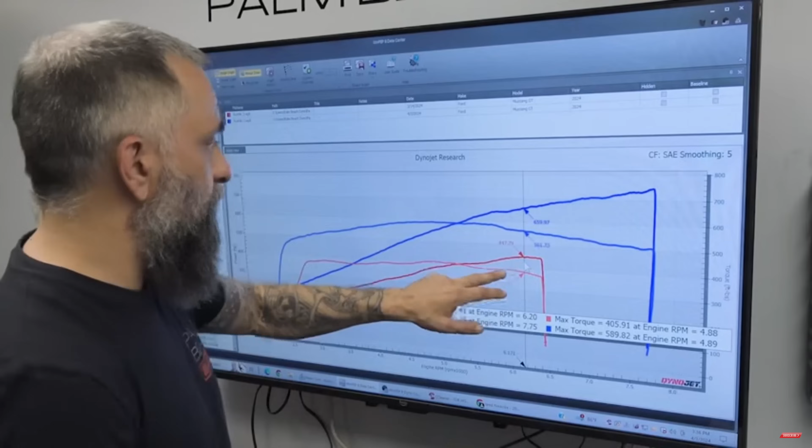So this is 4th gear versus 4th gear. Of course, we couldn't go all the way up in RPM before. That's why I showed you 3rd gear. But right here, well, we'll go to peak power. Peak power was 62 before, right there. So at the same exact spot, it's still up over 212 horsepower. And then, of course, with more RPM, peak to peak, we're up almost 300 horsepower. So all things considered, 746, 589, and this is on the 3.8 pulley.

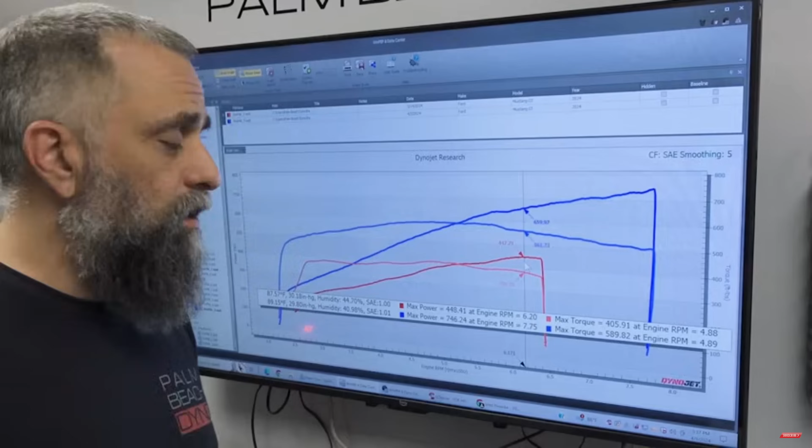On the lethal car, we had run the 3.7 and the 3.6 with the octane boost. So Kelly's starting off a little slower, but let's see if we can get anywhere near that 800 mark with the 3.8 pulley.

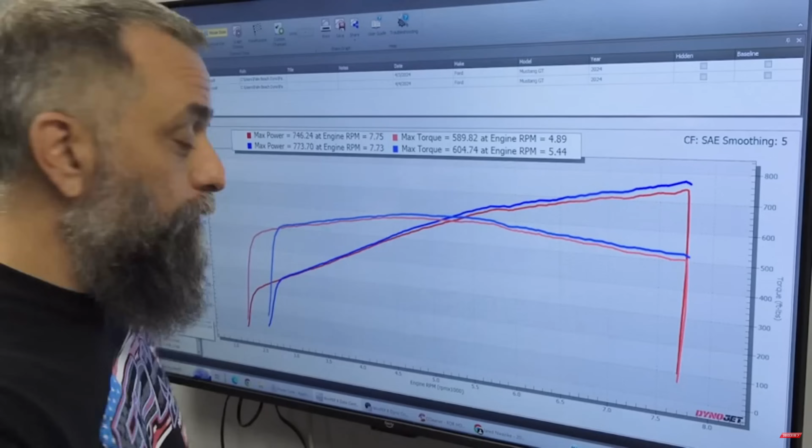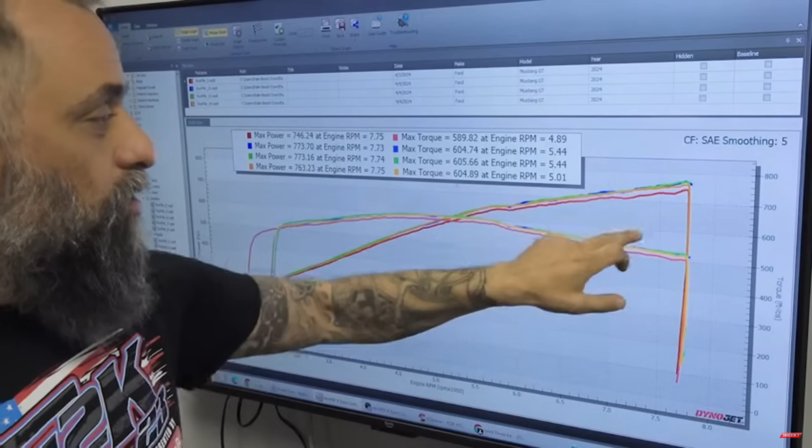Let's go over the numbers real quick. These were the best numbers on the 93 octane, and then we put the octane boost in, and I did 3 back-to-back pulls to show you the consistency here. 773 and 604. 773 and 605. And then on the third pull, 763, 604, and the only difference is this one little spot there at the top. Otherwise, it's identical.

Now, for me personally, when I supercharge my 2024 Mustang GT, if custom tuning is not available, I'm just going to be running straight 93 octane. I don't care to mix with the E85, and I don't care to fill up with octane booster every time I'm at the gas station. And I feel like 99% of people are going to be the same way.

They don't want to have to pull out their phone and calculate, okay, how much E85 do I need to pump and mix with my 93 octane. They're not going to want to have to add in octane booster every single time they go to the pump to risk detonation. That's just something that's inconvenient, and I'm personally not going to do.

You can call it laziness, but at the same time, for a car that literally is on a can tune on 93, it's not really worth it in my personal opinion. I will take that 700 horsepower to the wheels and run with it until custom tuning is available. And I believe a lot of people will do the same as well. But that's the stage 2 kits.

It's not the stage 1 kit. The stage 2 kit voids warranty. The stage 1 kit has been dyno tested on a stock car. So if you were to take a stock 2024 Mustang GT, stock manifolds, X-pipe slash H-pipe, I think it's H-pipe factory, so stock H-pipe, active exhaust or non-active exhaust, Whipple states that you could get 810 crank horsepower.

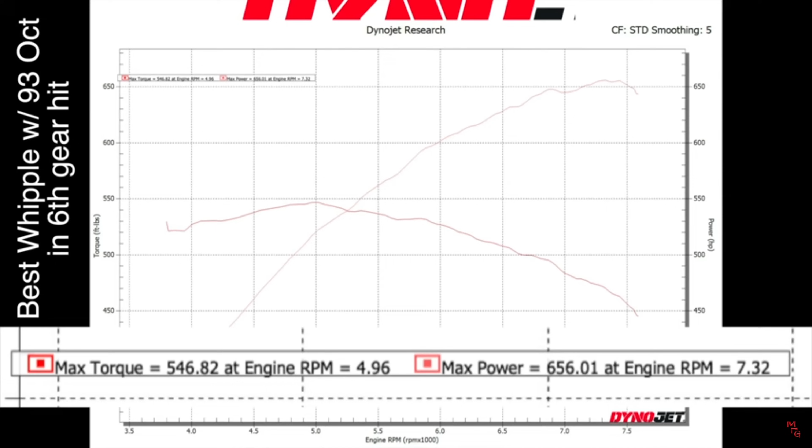As you guys saw, the car didn't even make close to what the advertised wheel horsepower would be. It made 656 horsepower. Whew. In my personal opinion, that's not worth it.

683 at 553 foot-pounds.

All right, so with the fuel tank adulterated, by that I mean we're running on E30, in 6th gear, the car made 683 wheel horsepower, 553 foot-pounds.